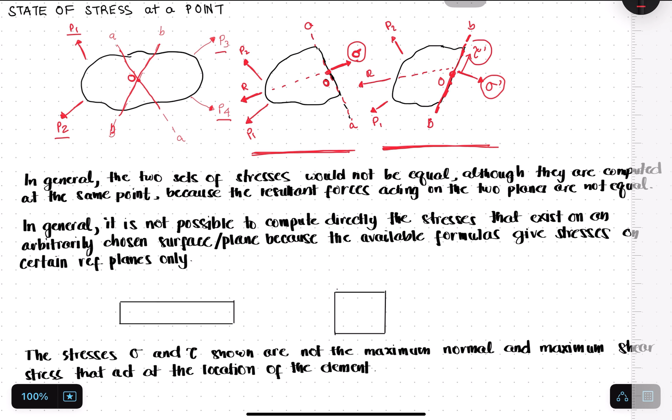We observed that the two sets, set 1 using reference plane AA and reference plane BB, even though we are concerned at point O, which both sets contain, they contain different stresses. This one has only normal stress present, while this one has both normal stress and shearing stress. This is true because the stress at a point will depend on the reference plane where we expose it.

So just because it's the same point, you can't cut through any plane you want and expect to get the same result for the stresses. No, it's not true. In general, the two sets of stresses would not be equal although they are computed at the same point, because the resultant forces acting on the two planes are not equal.

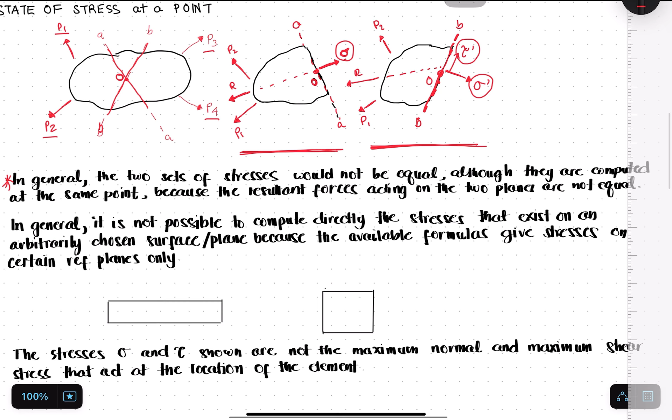Now what's our problem here? Our problem is if we want to compute the stresses acting on an arbitrarily chosen reference plane, for example at section AA and section BB, the problem is we cannot immediately use the formulas we studied, for bending stress, for shearing stress, because those formulas are actually used for certain reference planes only.

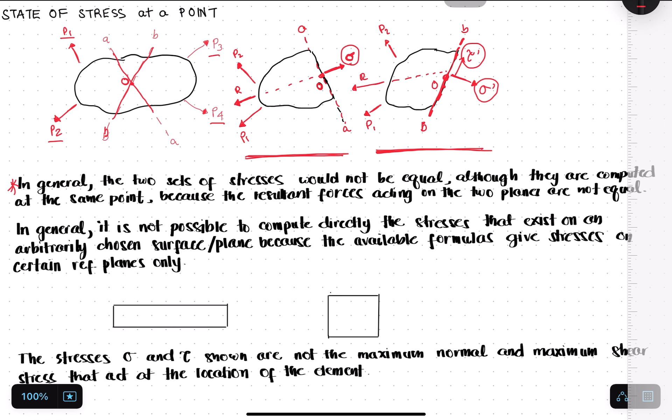Did you notice that in our discussion of bending stress, if this is our beam, here comes the shearing force, and here the bending moment. From that, we compute our sigma B, which is M over, if maximum, MC over I.

So if you observe, the section we use for the calculation of the bending stress is actually a cross-section that is normal to the longitudinal axis. Right?

Also our normal force - if there is a normal force present, when we compute the normal stress, we have the normal force over area, and that area is perpendicular to the longitudinal axis.

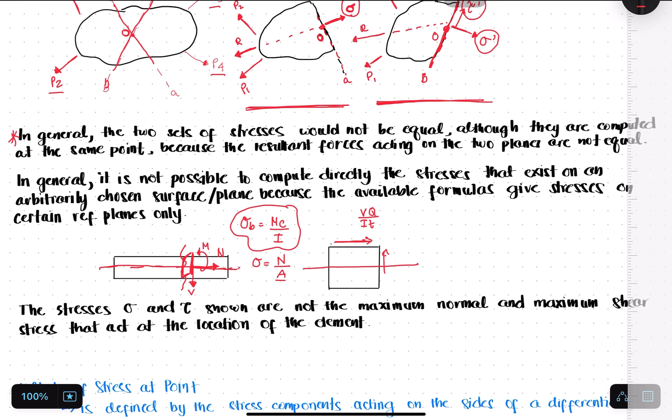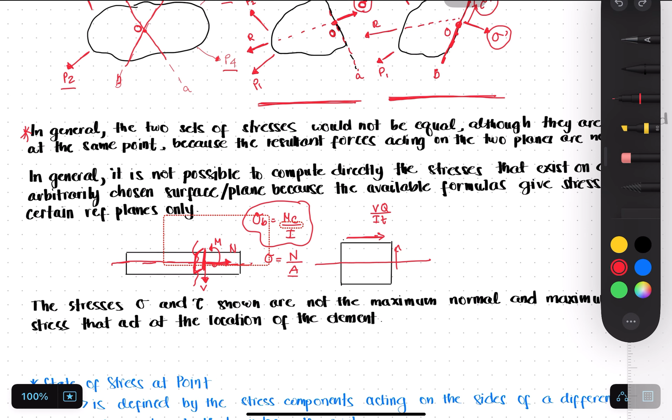Naka-incline dito. So, ano yung nararamdaman niya na stress?

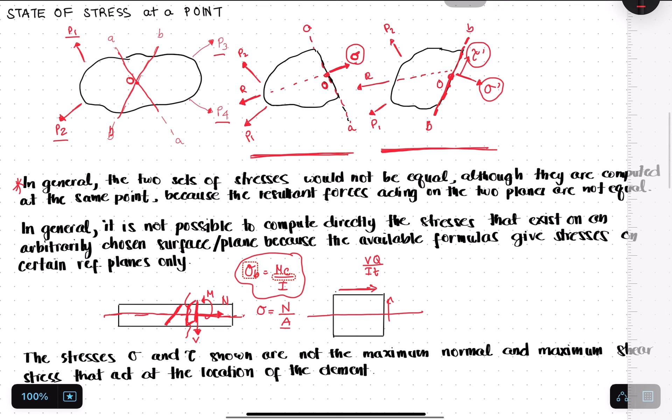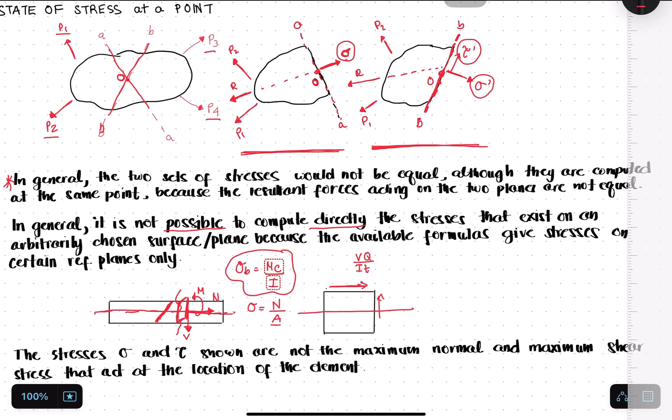So that's one of our problems: it is not possible to compute directly the stresses that exist on an arbitrarily chosen surface plane, because the available formulas give stresses on certain reference planes only.

The second problem is that the normal stress and shearing stress we compute through the formulas are not actually the maximum normal stress and the maximum shearing stress. That's not really the maximum.

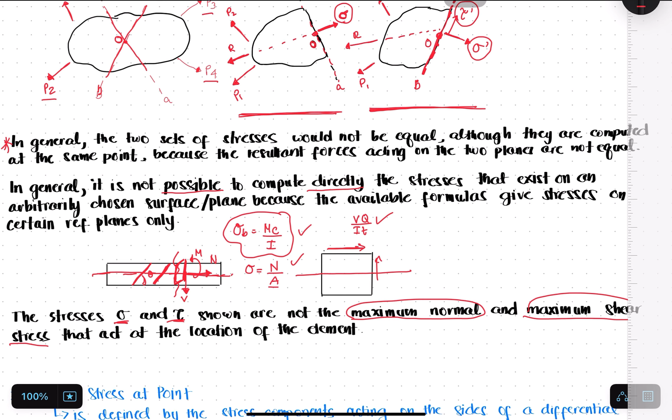We'll study later that the location where we can find the maximum normal and maximum shear stress is actually at an inclined plane, somewhere like this, at a certain angle.

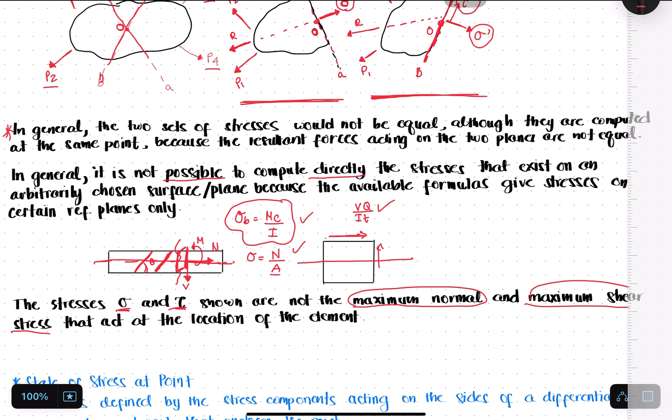So in our design, it's critical that we know this maximum normal and maximum shearing stress. With the previous knowledge we discussed, if that's all we base it on, we can't solve these important or critical points needed in our design.

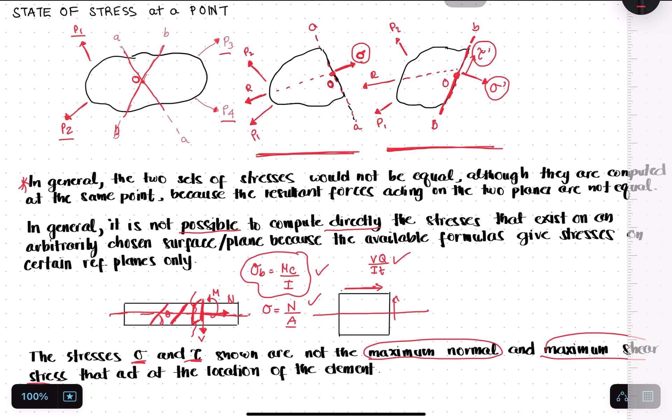That's why this topic is very important: the state of stress at a point. But what do you mean by state of stress at a point? The word 'state' itself means what is the state of stress at a certain point.

And to be able to define the state, stress components acting on the sides of a differential volume element that encloses the point—that is the definition of stress at a point. So if we have a point, let's say this point, we want to show its state of stress.

So let's enclose the point with a differential volume, usually in rectangular form, like this.

Let's include in the figure the stresses it feels on the mutually perpendicular planes, if we are talking about plane stress. Plane stress means our discussion is only 2D, so only the X and Y axis—it can be projected on a single plane. So we have a plane stress.

We know that this point possibly has a normal stress here, which we call sigma X. It's also possible it has sigma Y here, another normal stress but along the Y direction. And we know that whatever is on the right equals what's on the left; whatever goes up equals what goes down, by equilibrium.

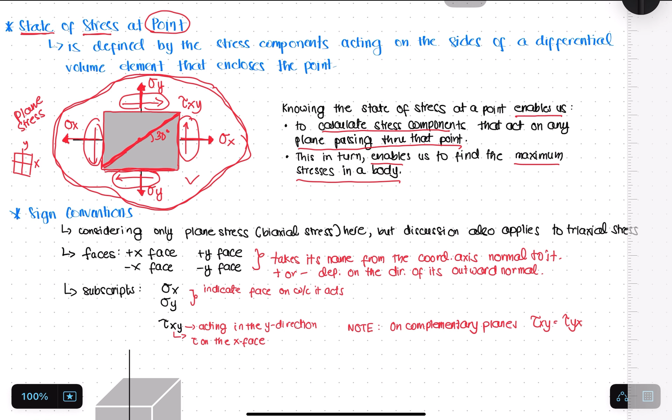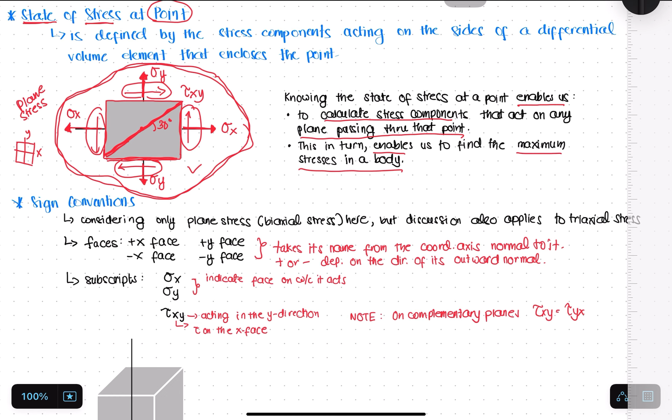So to do this, before we proceed to solving, let's first learn the sign conventions we need to adopt for the state of stress. These sign conventions we'll discuss are for biaxial stress.

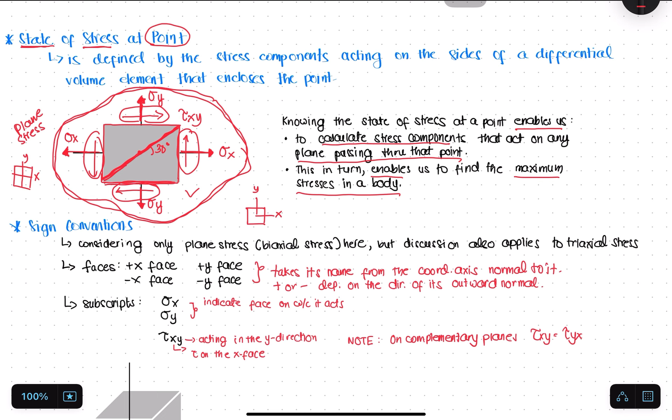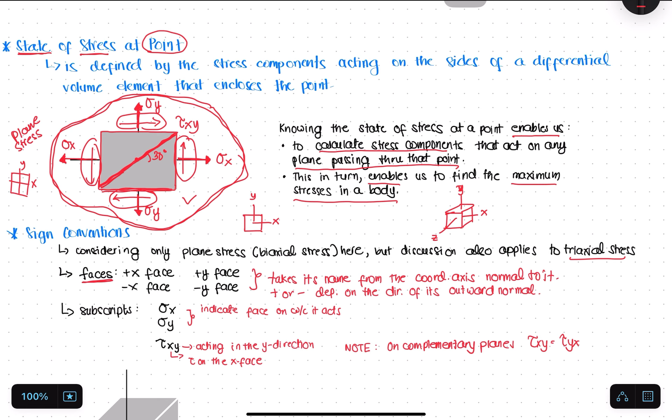So first na kailangan natin malaman is yung mga tinatawag nating face. In a biaxial or in a plane stress, meron tayong x face and then meron din tayong y face. So x face is... erase ko muna ito class para.

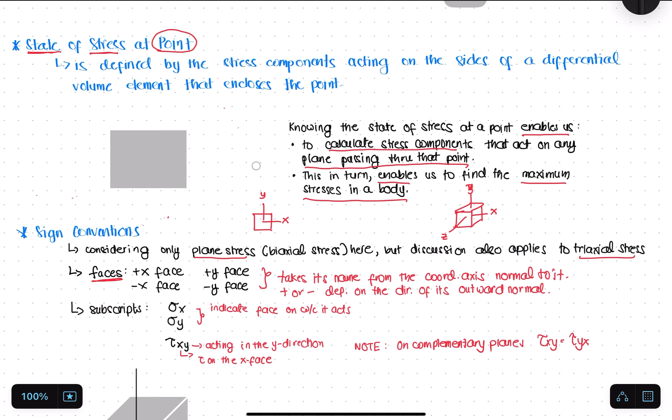Okay, so saan dito ang ating x face at saka y face? So define ko muna yung axis class. This is positive x, this is positive y. So meron tayong positive x and positive y.

The faces take their name from the coordinate axis normal to it. So if this is the coordinate axis x, yung normal sa kanya na plane is tinatawag natin na x face. But this is the positive x na axis, right? So this is our positive x face. Likewise, dito naman, negative x kasi to. So this phase here, etong phase dito, is negative x na face.

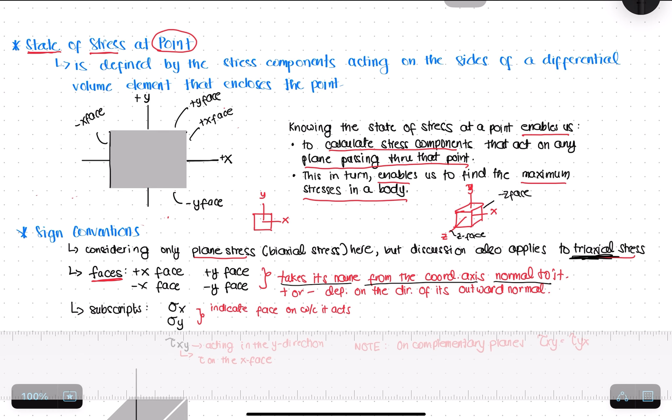Then dito naman, this is our positive y face. So yung phase or plane or surface na normal to this positive y, tatawagin nating positive y face. Then ito naman is negative y face. So kung triaxial yan, dagdagan nyo lang, ito yung z face na positive, and then yung sa likod yung negative z face.

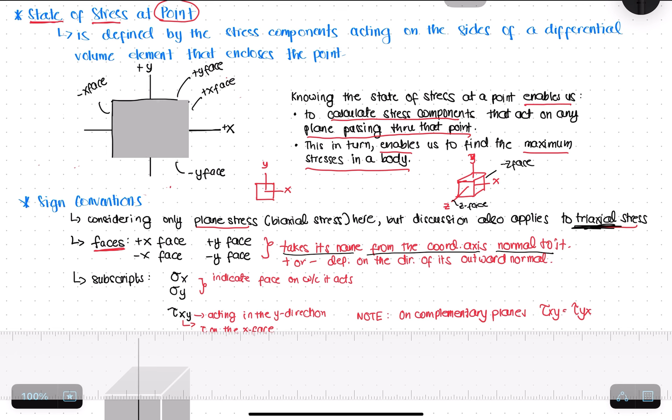Aside from that, yung mga stresses na mag-occur sa ating differential volume enclosing our point, so meron din tayong sign convention.

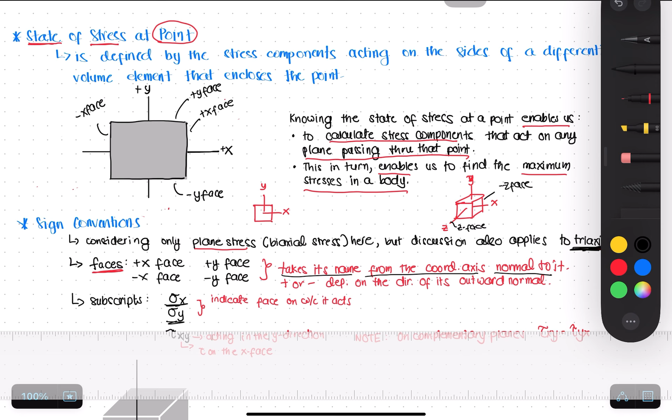Pero yung sa naming muna tayo. So tatawagin natin yung stress acting in the positive x, acting on the x face of the differential volume as sigma x, yung normal stress acting on the x face. So sigma x.

So depende, pwede yang maging positive class or negative. Pag positive, that indicates na tension ang nature ng ating normal stress. And then pag negative naman, it indicates na compression siya.

But if you are drawing the state of stress, pwedeng hindi mo nalagyan ng positive or negative as long as naka-indicate yung proper direction ng ating sigma x. So kung positive siya, away from the element or away from the face. Kung compression siya, towards the face.

Yung sa kabilang phase naman, yung sa opposite phase, yung negative x phase, yung normal stress na meron siya should be equal to the sigma x na nandito sa x phase pero opposite sila ng direction. Okay, so kung to the right ito naman to the left.

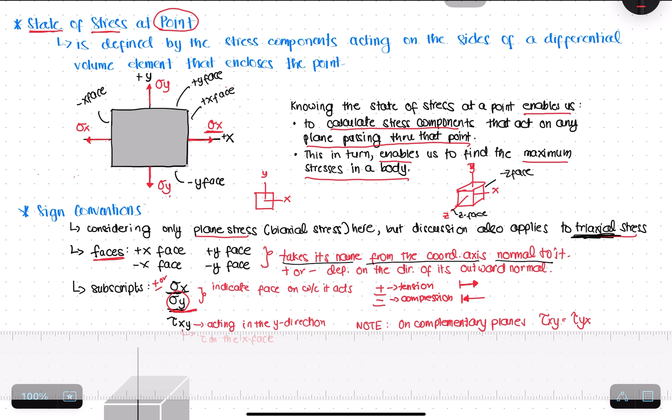So yan. Then similarly, yung sigma y, this is the normal stress acting on the y face. So kung tension siya, so away from the element, sigma y. And on the opposite face, that is equals also to sigma y but acting on the opposite direction.

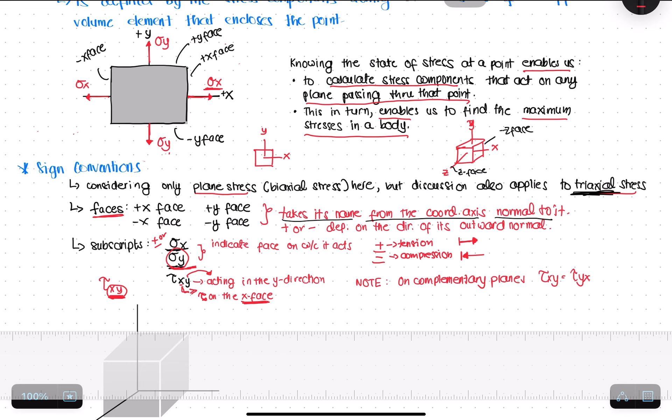Okay, how about the shear stresses? Yung shear stresses, mapapansin natin yung pag-name, yung mga names nila is made up of dalawang subscript, x and y, pwedeng y and x, or any combination. So ano ba yung ibig sabihin ng mga subscript na to? The first subscript indicates kung saan nag-a-act yung shearing stress natin on what phase. So if x ang nandito, so the shearing stress is acting on the x face. Then yung pangalawang subscript, saan nag-a-act na direction? In the y direction, in the x direction, or in the z direction.

Okay, so dito, kung ito yung direction ng ating shearing stress, ang pangalan nito class is tau, since it's acting on the x face, so tau x, and then saan papunta? Iba sa y direction, so this is tau xy. And sa kabila, we know that equal lang sila but opposite in direction, so this is also tau xy.

Okay, and then next, kung dito naman, we know that itong apat, they are equal, right? Pero yung pangalan nila magkakaiba. Ito lang yung parehas. Ito ring dalawa dito, yung magkaparehas. So ang pangalan naman nito is shearing stress acting on the y face.

Dito, y face yan. So tau y, and then saan siya nag-a-act na direction? In the x direction. So that is our tau yx, and this is also our tau yx.

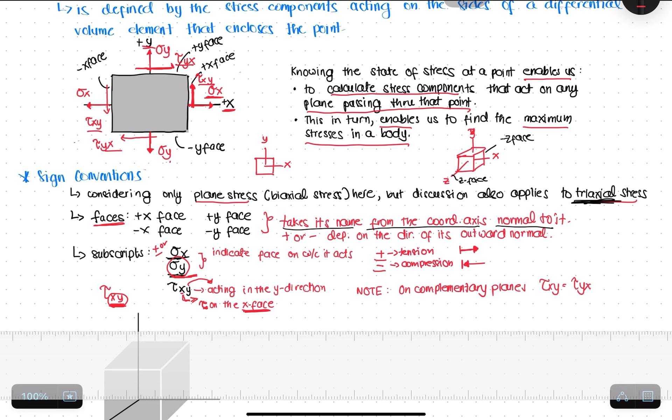So that's how you properly name or label the stresses on the differential volume enclosing a point. This is very important para ma-proper natin na ma-draw at saka ma-understand natin kung ano talaga yung mini-mean na stresses, saan siya nag-a-act ng mga planes.

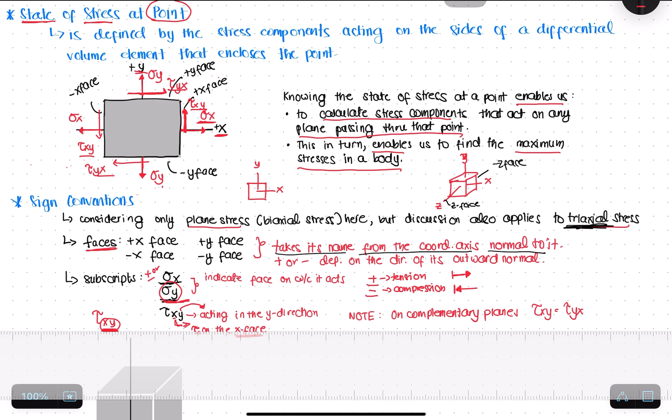Okay, so if let's say here, triaxial yung stress natin. Don't worry, similar lang sila ng concept. I-try natin kung na-understand ba natin yung proper labeling of the stresses.

Okay, so this one is our, kung may normal stress dyan, sigma x, tama? How about here? Okay, sigma y, right? Dito naman, sigma z. So hindi ko na isulat yung sa opposite niya, ha?

Okay, next. Possible na may shear tayo dito. And since triaxial to, meron din siyang shear dito. So ang pangalan ng shear dito is tau, acting in the y face, going in the x direction. Dito naman, tau acting in the y face, going in the z direction.

How about dito sa x face? So meron tayong shearing stress dyan. Meron din dito, parallel to the z. So ang tawag dito, tau acting on the x face. So tau x and then papunta sa y direction. This is also tau x and then papunta sa z direction.

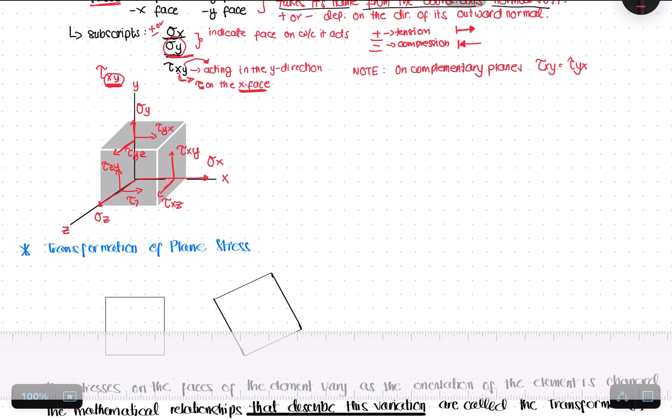Okay? So dito naman, you have the shearing stress there and then dito din. So ang tawag naman dito, tau z y and this is tau z x. So yan, ganun siya, class.

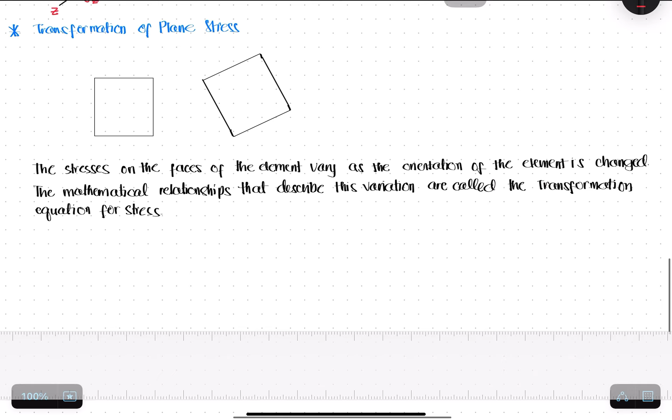Okay, so transformation of plane stress. Just like we have discussed in the very start of this discussion, magkakaiba ng stress yung makukuha natin if we have different reference planes, although we have same na point, magkakaiba talaga yan. So similarly, yung element natin, class, if this is our point, yung state of stress na meron tayo dito, yung mga nandyan, pag i-orient natin yung element at a certain inclination, hindi na siya ganito.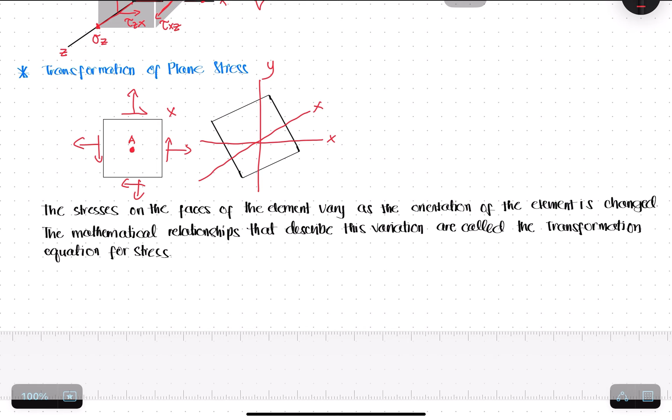Like for example, ito yung original na x and then y. Then i-tilt natin siya at a certain angle, let's say theta. So naging ganito na siya, y prime. So yung state of stress natin dito at point A, wag niyong expect na equal lang sa mga na-solve natin dito. Kasi magkaiba talaga, okay, so magkaiba yan.

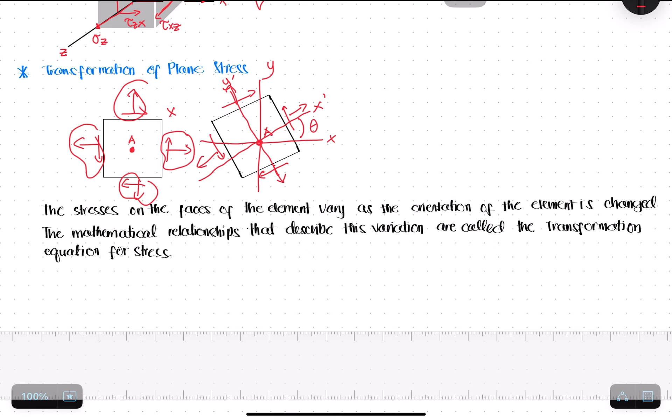Yung value dito, yung dyan, dito, dyan. Okay, so dito at saka dyan. So magkaiba talaga. At paano natin ma-solve yung state of stress na na-transform, no? Pwede tayong gumamit ng dalawang ways.

Using yung tinatawag natin na transformation equation for stress. Nag-involve yan ng use o paggamit ng maraming equation from the word itself na equations for stress. Marami yung equations, so to be able to use this, kailangan alam mo paano siya na-derive, ano yung mga variables doon sa equation natin. Tapos kailangan kaya mong i-memorize, no? So medyo mahirap siya, yung transformation equation, kung hindi mo talaga siya naintindihan. Tapos mahirap din i-memorize, i-remember yung formulas.

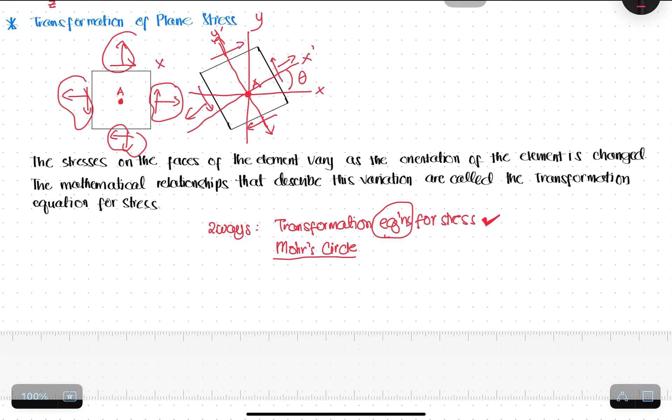Now yung pangalawang method natin is yung Mohr's circle, a graphical representation ng transformation equation for stress. So ang kagandahan nito, with the graph, pwede mong ma-visualize yung state of stress ng point natin properly. And with the visualization, pwede mo siyang applyan ng trigonometry for analysis. Makukuha mo na yung different stresses at different planes, at different orientation ng element, makuha mo talaga siya. So you do not need to memorize the formula, you just have to know how to properly use this method. Paano i-graph yung Mohr's circle.

So out of these two, ang i-tackle lang natin is using the Mohr's circle. I will skip this one, the transformation equations for stress. But if you want to have the knowledge about transformation equation for stress, you can refer to our reference books, particularly yung kay Pytel, pwede din kay Hibbeler, at saka yung kay Singer. Okay, so sa next video, we will talk about how to do the Mohr's circle.